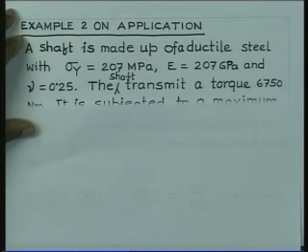It is given that a shaft is made up of a ductile material with sigma y equal to 207 MPa, modulus of elasticity 207 GPa, and Poisson's ratio 0.25. The shaft transmits a torque of 6750 Newton meter. It is subjected to a maximum bending moment of 9000 Newton meter. Using a factor of safety equal to 2, determine the required shaft diameter.

So the shaft is made up of steel, and it is indicated that you have to make use of a factor of safety equal to 2 on the yield point. Therefore, for the solution, we must make use of allowable stress equal to sigma y by factor of safety, which gives 207 by 2, that is 103.5 MPa.

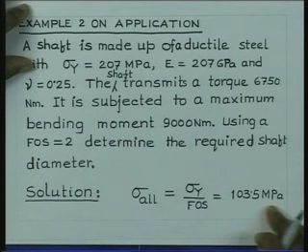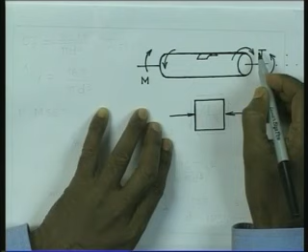Now let us look into how we go about applying the criteria. Look into the component. If we draw the component schematically, this is the shaft. It is subjected to a twisting moment and also a bending moment. With this type of bending moment applied on the shaft, you are going to have tensile stresses at the 6 o'clock position and compressive stresses at the 12 o'clock position. Under the action of the twisting moment, you are going to get shear stresses which are maximum around the outer circumference, and therefore if we consider an element at the 12 o'clock or 6 o'clock position, these are the elements which are critically loaded.

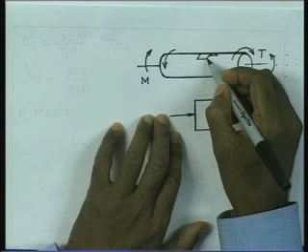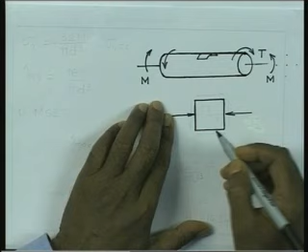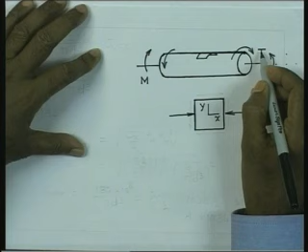So now let us consider an element which is just around or close to the 12 o'clock position. I am talking about this element which is here, close to this position, and if I take this element and develop it, it is shown here. Let us consider this is the x direction and this is the y direction. Now, under the action of the bending moment, you are going to have compressive stresses, and under the action of the twisting moment, you are going to get shear stresses. So the shear stress on the right hand face will be directed in the same sense as the given torque, and therefore the shear stress on this face is going to be like this. Similarly, the complementary shear stresses are going to come up on the top face and also at the bottom face.

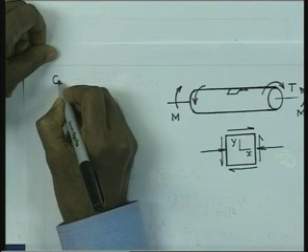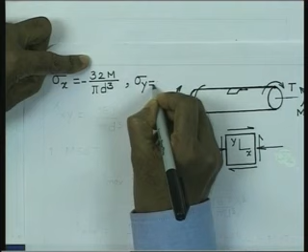Now the stresses therefore are: sigma x is equal to the maximum stress, which is given by 32 m by pi d cube, where d is the diameter of the shaft and m is the bending moment. This is obtained from the flexure formula, and in this particular case we have the clear specification that sigma y equal to 0. Note that I have written this sigma x to be negative because it is subjected to compressive stress at the 12 o'clock position. Similarly, the shear stress, which you can obtain from the torsion formula of a circular shaft, is given by 16 T by pi d cube.

If we want to consider this material for design, there are two criteria which are applicable here. One is the maximum shear stress criterion, and the other one is the maximum distortion energy density criterion. This is a ductile material, therefore you have the possibility of considering these two criteria to be applicable.

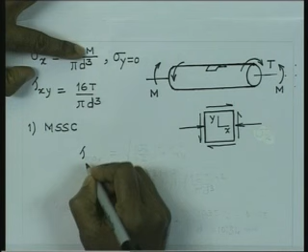Let us now try to see, if we apply the maximum shear stress criterion, what diameter we get. So first we consider the maximum shear stress criterion. This criterion states that failure will take place when the maximum shear stress reaches a critical value. Now, the maximum shear stress for this case we have tau max.

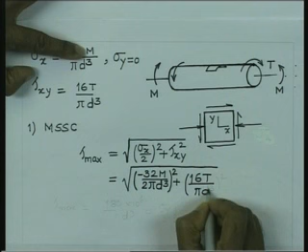It is given, you can calculate from the Mohr circle radius, which is nothing but square root of sigma x by 2 whole square plus tau xy square. And if we substitute the value here, then we get this is minus 32 m by pi d cube, and we have a division by 2, that is sigma x by 2 square, plus 16 T by pi d cube square.

We have been given that bending moment is equal to 9000 Newton meter, and torque equal to 6750 Newton meter.

So we have M equal to 9000 Newton meter and T equal to 6750 Newton meter. If we make the substitution and write that this tau maximum can have value at the most sigma y by 2, which is the shear stress in uniaxial tension, and we have a factor of safety of 2, therefore it is going to be sigma y by 4.

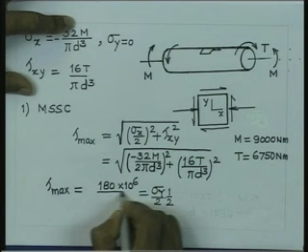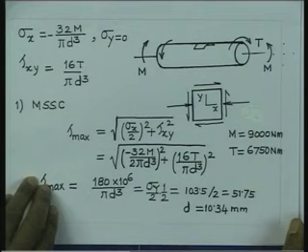So therefore this can have a value equal to sigma y by 2, the shear stress in uniaxial tension, and the factor of safety of 2 comes here, so it is sigma y by 4. If you plug in the values of M and T, you get this as 180 into 10 to the power 6 divided by pi d cube, all in millimeter units. Therefore, what you get is diameter d. You can write this value as 103.5 by 2, which is 51.75, and therefore you get d as 10.34 millimeter.

We will now consider application of the distortion energy density criterion. According to this criterion, the distortion energy density at failure should have the value corresponding to the one at the yield point in the uniaxial tensile test. So, therefore, if we apply this criterion,

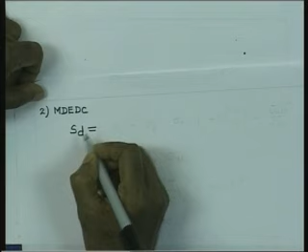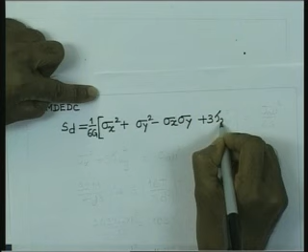SD, strain energy density of distortion, is given in terms of the Cartesian components of stresses by 1 by 6g times sigma x square plus sigma y square minus sigma x sigma y plus 3 times tau xy square, and this strain energy density is to be limited by sigma allowable square by 6g.

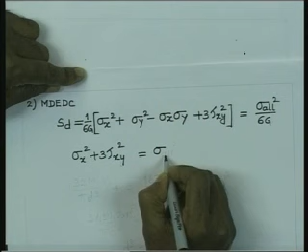So it gives us sigma x square plus 3 tau xy square equal to sigma allowable square, and if you substitute the values, we have minus 32 M by pi d cube whole square plus 3 times 16 T by pi d cube whole square equal to 103.5 whole square,

and this gets simplified to 343.42 into 10 to the power 6 by pi d cube is equal to 103.5, and this gives finally d cube equal to, and therefore d equal to 11.78 millimeter.

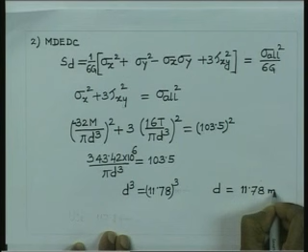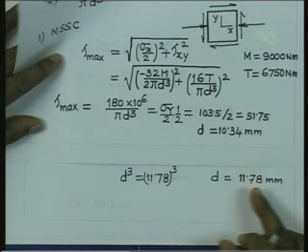So it means that we have to use, you see that the two values that we have obtained are 10.34 millimeter and 11.78 millimeter. Therefore, use the larger value. It is good to keep the larger value for safety, and therefore use D as 11.78 millimeter.

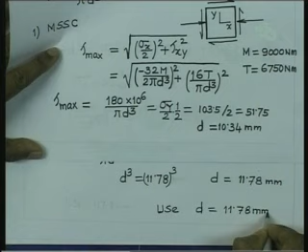So thus you see how the criteria of failure can be applied for the design calculations.

We have considered the theories of failure for materials which are perfectly homogeneous, with no defect in the material. But in practice, materials are not free of defects. You could have materials with cracks. These cracks can be inherent in the material, or they can also come up during service or manufacturing.

Therefore, we have situations where we may have to see the safety of a component which has defects. I would like to emphasize that machine components made up of materials are not all the time free of defects. Think of casting: if we make a component out of casting, blowholes can remain in the material and act as a defect. If we think of manufacturing by welding, imperfect welding can give rise to a disjoint like a crack in the component, and therefore there is a possibility of defect.

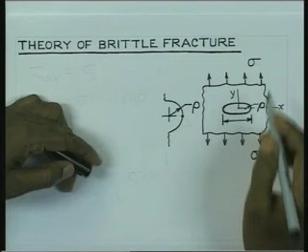Now suppose you think of a component like a plate having an elliptical crack, oriented in the X-Y directions, and the plate is loaded with sigma. Its major axis is 2a, and the radius at the end of the major axis is, let us say, rho.

For an elliptical geometry, this rho is nothing but, if b is the semi-minor axis, then it is b square by a. So if the minor axis of the ellipse is 2b, then the radius of curvature at the end of the major axis is b square by a, which is shown to a larger scale here.

So this point, let us indicate by A. When the component with this sort of cutout is subjected to loading sigma, it is well known that there will be stress concentration at the point A.

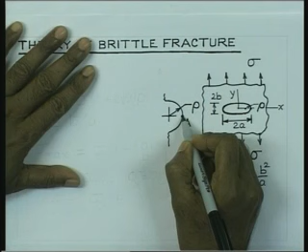So if sigma is the external stress, then the maximum stress is going to occur at point A, and this sigma maximum is equal to sigma A. It has been calculated by Inglis, and the value is given by sigma into 1 plus 2 square root of A by rho. That is the value, and this rho, as I have indicated, is nothing but b square by A.

Hence, if we now simplify by putting rho equal to b square by A, then this maximum stress is given by 1 plus 2 A by B. Look at this: the maximum stress equals sigma into 1 plus 2 A by B.

Now, if the dimension B is reduced to 0, or the minor axis is reduced to 0, then what we find is that the stress shoots to infinity. So what we get now is that this stress sigma y, which is nothing but sigma max at point A, the maximum stress acting in the loading direction, becomes infinity when B tends to 0. So the stress is infinity.

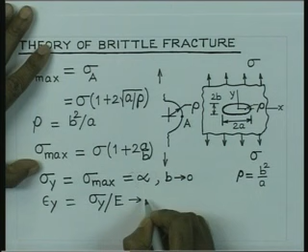Similarly, since this point is subjected to purely tensile loading, the strain is also equal to infinity, which is nothing but sigma y by E, that also shoots to infinity. So if we were to apply the classical theories of failure, based on maximum principal stress or maximum principal strain, we find it is not possible, because the magnitude of the maximum stress and maximum strain shoots to infinity.

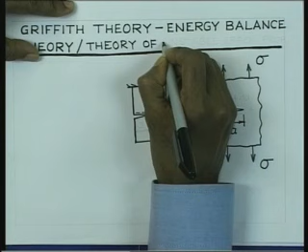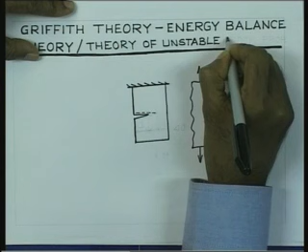So that was the difficulty in applying the classical criteria of failure, and to obviate all this, there was a new way to look at the failure of brittle materials in the presence of a crack, propounded by Griffith. It is known as Griffith theory or energy balance theory, also known as the theory of unstable crack propagation.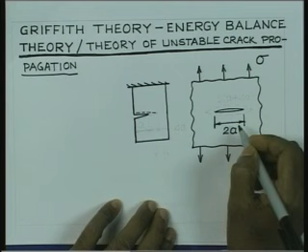Now let us look schematically at a case of a plate again of uniform thickness, consisting of a sharp crack of dimension 2a. What we are interested in looking for is what will be the condition so that this crack will extend unstably.

Alternatively, think of a situation where you have a plate pulled at this end, consisting of a crack of dimension, let us say A. What is the condition at which it will extend unstably, or if it extends to an enlarged length a plus delta a, what is the condition to be satisfied at the point of onset of extension? Similarly, if the crack is to extend to dimension 2 times a plus delta a, what is the condition to be satisfied for the extension of the crack?

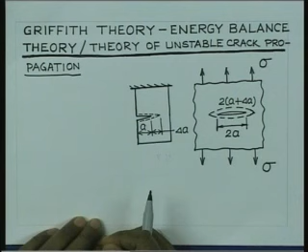That is the subject which was examined by Griffith, and he considered that this extension phenomena of the crack can be treated like a thermodynamic process, and the condition for the extension can be obtained from the consideration of energy balance.

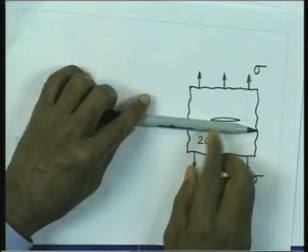So let us consider the second example, that we have the plate with this loading and the crack is of dimension 2a. If you consider for the moment that this particular component is not having any crack in it, and it is loaded with stress equal to sigma.

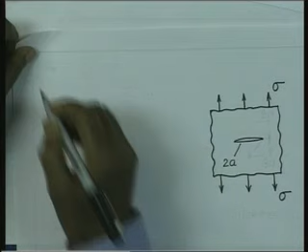Then the strain energy, since it is an uncracked component, the strain energy density at any point is going to be sigma square by 2e, and therefore the total strain energy stored in the body would be equal to sigma square by 2e multiplied by the volume of the body. So for the uncracked component, the strain energy stored is nothing but sigma square by 2e into the volume of the component.

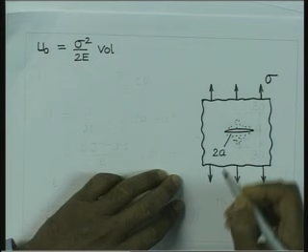Now, if we introduce a crack here, because of the crack you will find that a portion of the material lying just above and below the crack is going to be free of any loading, free of any stress and strain. Let us approximate that there is a zone here which is like this.

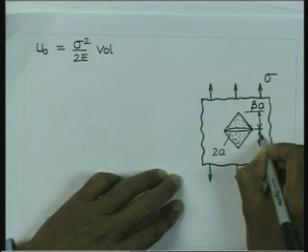This is the zone, its height is, let us say, proportional to the crack dimension a. So it is beta a, let us say. Similarly, this side also we have a length equal to beta a. So that is the portion which is going to be load free.

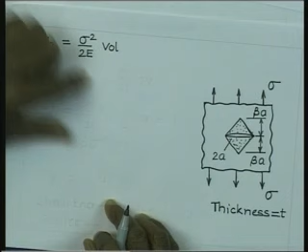If we just consider the thickness of the plate to be equal to T, then the difference in energy between the two cases: in the first case without the crack the whole body is available. In the second case we have the body with a portion free of any stress and strain, and therefore the energy in the second case with the crack can be written as the strain energy of the earlier state minus the strain energy which was stored in these two triangular regions.

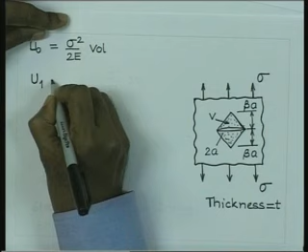So if you consider that the volume of the triangular region here is V, then we can write that the energy in the second case is going to be equal to U0 minus sigma square by 2E, that is the strain energy density, multiplied by 2 times V, that is the energy in the second case.

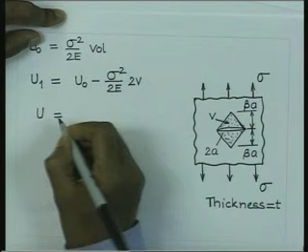Now we can write the value of this V, and therefore this difference in energy, considering the energy in the second case is reduced. So the reduction in strain energy, if we represent by U, is nothing but U0 minus U0 plus sigma square by 2E into 2V. We can write U as nothing but U0 minus U1, and therefore it is nothing but sigma square by 2E multiplied by 2 times volume.

We can write this as sigma square by 2E, where that volume is nothing but half, this length is 2A, this height is beta A, and the thickness is T. So this is the volume of the triangular zone, and if you make simplifications, it comes out to be equal to beta sigma square A square into T divided by E.

So the reduction in strain energy of the body is given by beta sigma square A square into T by E. In fact, Griffith did exhaustive calculations, and it was shown that this beta is nothing but equal to pi.

You can also see another thing happening: while the uncracked body is giving rise to a crack, there is breaking of material bonds, and this breaking of material bonds requires some energy. When we give energy as input to break those bonds, after the bonds are broken, where does that energy go? That energy gets stored as the surface energy, it gets stored at the surfaces.

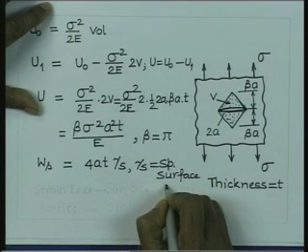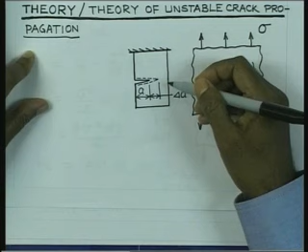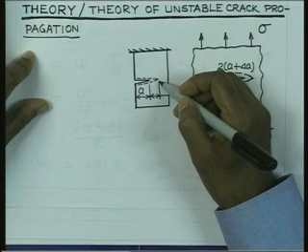Now, when we consider the loading of a component like this, as you deform the component, you input strain energy into the body, and as soon as the crack extends, there is creation of new surfaces through the breaking of bonds, and therefore this strain energy is getting converted into surface energy. So while crack propagation is taking place, you really have two forms of energy at play: on one hand, the strain energy, and the other form of energy is surface energy.

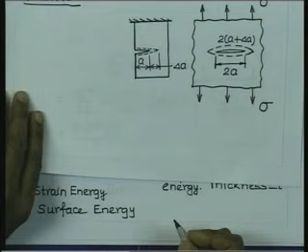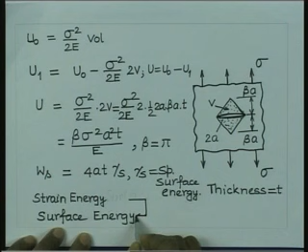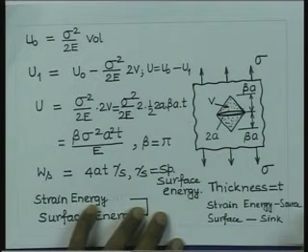So these are the two forms of energy involved in the crack propagation process, and as the crack extends, the strain energy of the body is getting reduced, while at the same time the surface energy of the body is getting increased. Therefore, we can consider that there is a conversion of energy from strain energy to surface energy during the crack propagation process. So crack extension is an energy conversion process wherein the strain energy gets converted into surface energy. We can also think of the strain energy as the source and the surface as the sink, and therefore energy gets transferred from the source to the sink during the crack extension process.

So what is the condition for unstable crack extension? If the energy is gradually getting converted from strain energy to surface energy, what is the condition for unstable crack extension? There is a rate at which strain energy is getting released from the body, and at the same time a rate at which energy is getting absorbed at the surfaces. If the rate of energy availability is more than the rate of absorption of energy at the surfaces, then unstable crack extension will take place. So Griffith stated that the condition for unstable crack extension is that the rate of strain energy release is greater than or equal to the rate of surface energy absorption.

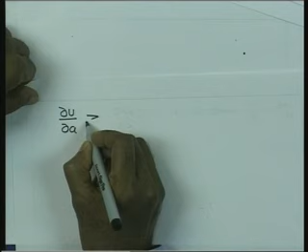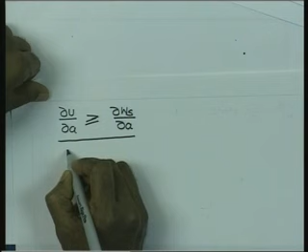So we can write the condition for unstable crack extension as delta U delta A. This delta U delta A is the rate of release of strain energy, which should be greater than or equal to the rate of absorption of surface energy, that is delta Ws delta A. So the rate of release of strain energy greater than or equal to the rate of absorption of surface energy is the condition of unstable crack extension.

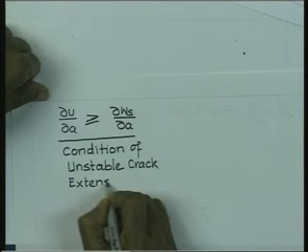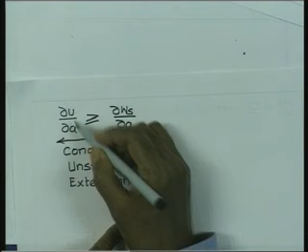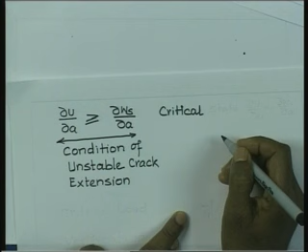So the critical state is reached when delta U delta A is equal to delta Ws delta A. This is the critical condition when the crack is going to begin to extend: delta U delta A is equal to delta Ws delta A. So the crack is going to extend when delta U delta A equals delta Ws delta A.

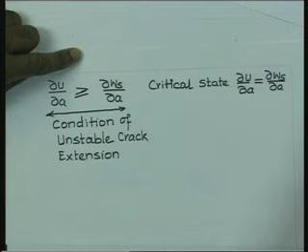So we can now write the value of delta U delta A. Our U was pi sigma square A square into T by E. Therefore, if we take the derivative, it is going to be twice pi sigma square A T by E, that is delta U delta A. And if that is equal to delta Ws delta A, which is nothing but 4T times gamma s.

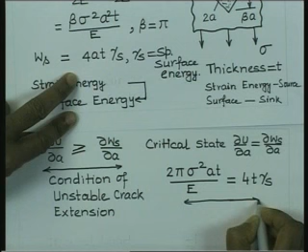So this is the condition for the onset of extension, the onset condition, and therefore it gives you the loading which will trigger the extension. Therefore, this critical load, sigma critical, is given by the square root of E into 2 gamma s by pi into a. This is a very important relationship. It gives you the critical stress which will trigger the extension of a crack in a material with surface energy capacity equal to gamma s.

Herein you see that E is a material property, gamma s is a material property, and therefore the critical load capacity of a component is related to the crack dimension by this relationship. This is the outcome of the Griffith theory, that you can calculate the critical load given the crack dimension in a material with material property gamma s.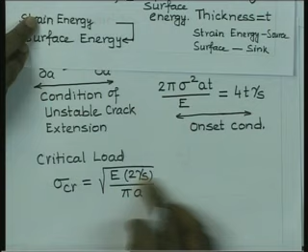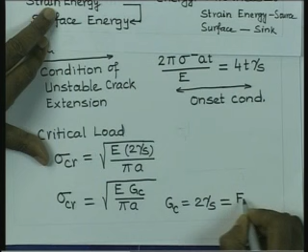In general, it is written as sigma critical is equal to square root of E into Gc by pi a, where Gc is equal to 2 gamma s. This is also a material property and it is known as fracture toughness or fracture resistance of the material.

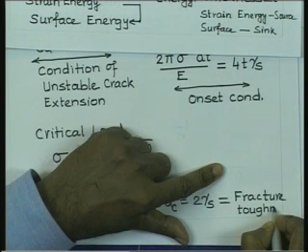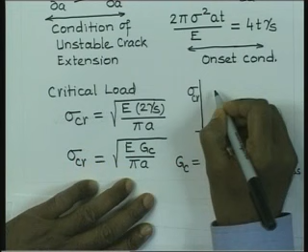So the critical stress is given by this one. In fact, Griffith did experiment with glass fibers and he showed that the variation of this critical load with the crack dimension varies as expected, it is going to vary like this. So therefore it was experimentally verified that this rule is correct.

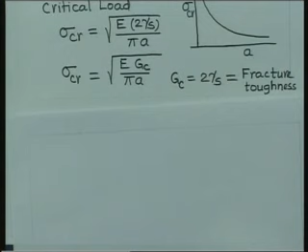This particular relationship has a lot of practical meaning. It gives you for the first time the capability of calculating the load capacity of a component with defect. So if you are given the value of the loading, if you are given the value of crack dimension A, or if we consider a component with a known crack dimension, then this relationship gives you what is the load capacity, or what is the safe load, it gives you sigma.

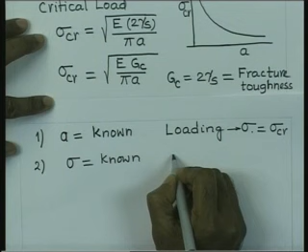Let me put it this way: if we know the crack dimension in the component, then it is possible to calculate the loading which will trigger the crack extension, and therefore one can ensure safety by keeping the load below this level. Alternatively, if we know the loading on the component, then it is possible to calculate the crack dimension A which will trigger crack extension or failure of the component.

This second approach has given rise to a new consideration for design. It is known as damage tolerance design, or damage tolerant design. What it means is that we can calculate how much damage the structure can tolerate, a component can tolerate, given the loading and the material property.

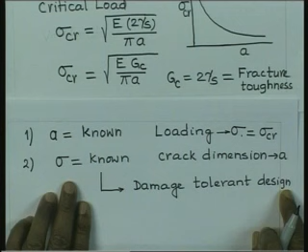Before this theory was propounded, it was not possible to assess the safety of components with cracks, but after this was known and some more developments took place, the damage tolerant design has come into being and it has been utilized for aircraft structure design. Even if the critical component of an aircraft is having a crack in it, one can find out whether the loading acting on the component is still going to lead to safe performance or not. That is why all airborne structures are examined for damage tolerant design.

So by considering the particular damage in the critical component and taking the loading in the component, one tries to ensure whether failure is going to take place or not, by considering this relationship of the type given by Griffith.

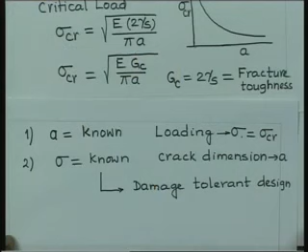One question which can come up is how do we go about determining this fracture resistance of the material? So let us try to consider how do we get the fracture toughness of the material evaluated experimentally.

For that, we consider a specimen of this type and we apply the load here and try to monitor the displacement. If we consider a particular crack size A and try to plot the variation of the load with the displacement u, since it is an elastic material with no plastic or nonlinear deformation, we are going to get the variation of load with deflection given by this.

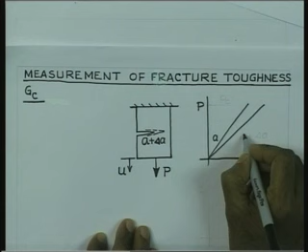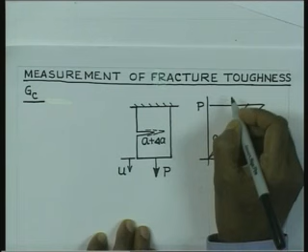If you consider a crack of a larger size, let us say A plus delta A, and try to plot the load versus deflection, you are going to see a variation of this type. Here, for the same load you are expecting larger deflection because there is a crack of larger size. At the critical level of the load, when P reaches critical level, you are going to see extension of the crack from length A to A plus delta A.

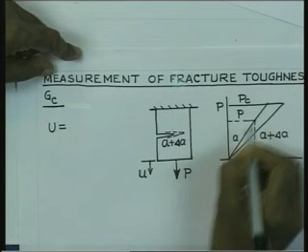If we calculate the strain energy at any level, suppose we consider this level of loading, let us say P, and this is the deflection u, then the strain energy at this point is nothing but half P square by K, where K is the stiffness of this component. If we make use of the compliance, then this is nothing but half P square into C, where C is known as compliance and is the reciprocal of stiffness.

If we consider the rate of release of strain energy delta U delta A under a constant load P equal to Pc, then it is going to be given by half... I beg your pardon, I made a mistake here, it should be half P square into C, and therefore it is going to be half P square delta C delta A, and this is, we have to calculate the value for P equal to Pc.

So this gives you the rate of strain energy release per unit crack extension, and for unit crack extension, if the thickness of this specimen is equal to T, then the energy release rate delta U delta A at P equal to Pc is given by 1 by 2 T P square delta C delta A.

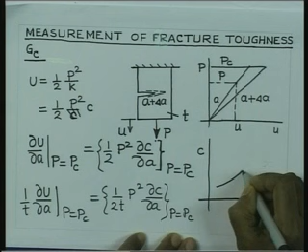If we can draw a curve showing the variation of this compliance for different crack lengths, we can consider specimens of different crack lengths, and if we find out the slope, that will give us stiffness, and reciprocal of that will give us compliance. So we can plot a curve, and this curve will be looking something like this.

If you are trying to do an experiment with a specific crack length, then for that crack length A, you can find out the slope of the curve delta C delta A, and hence this strain energy release rate at the point when the crack is extending is given by 1 by 2 T P square delta C delta A, where P equal to PC, that is nothing but the critical strain energy release rate, and this is equal to GC, fracture toughness of the material.

At the point of crack extension, the strain energy release rate is critical, and that is nothing but the fracture resistance of the material. So, in order to determine the value of this fracture resistance of a material, we can do experiment like this.

We can take a specimen of a particular geometry, and then we introduce a crack of certain dimension, and we do the testing by applying some load and try to find out what is the load at which the crack is going to extend, and making use of this formula we can find out what is the critical strain energy release rate.

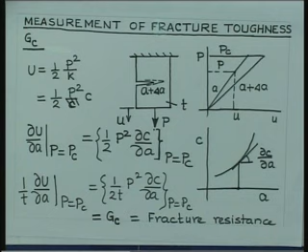In fact, experiment is done along this line to find out the fracture resistance of the material.

So, what we have done over the last couple of lectures is consider the theories of failure of materials which are homogeneous, and we have considered 5 theories. One is based on the maximum principal stress, the second based on the maximum shear stress, then we considered the maximum principal strain criterion, and then 2 criteria based on energy density: the first based on the maximum strain energy density, and the second based on the maximum distortion energy density.

We have shown that these criteria are not equally applicable to all materials. The ductile materials are mostly obeyed by the maximum shear stress criterion and the maximum distortion energy density criterion, and for the brittle materials the other three criteria are applicable. We have also illustrated the usefulness of these criteria by considering design exercises.

Then we considered, if the material has a defect like a crack, how do we go about assessing the load capacity of such a component or of a component made up of such material. In that connection, we talked about the energy balance criterion due to Griffith, and we showed that the condition for unstable crack extension is that the rate of strain energy release must be greater than or equal to the rate of absorption of surface energy.